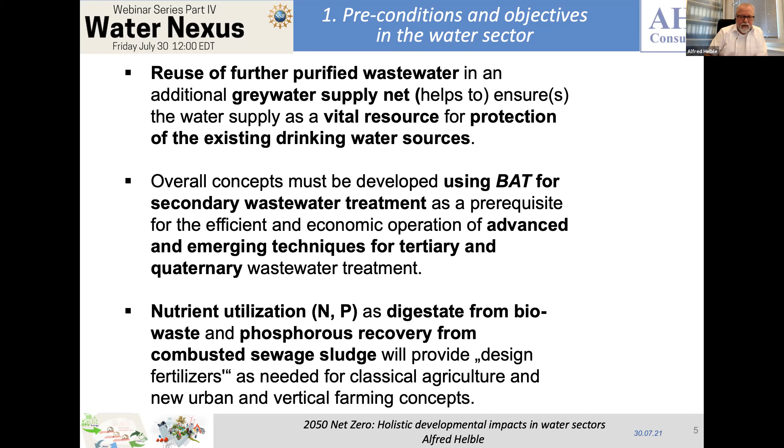So we have to look and focus on the full treatment line, which is on the water side the secondary, tertiary, and quaternary wastewater treatment, but also on the sludge treatment, including sludge utilization as fertilizer as long as possible. But this, you will see, is only possible in Europe and Germany until 2029. After that we will have to burn and combust all sludges and recover phosphorus later.

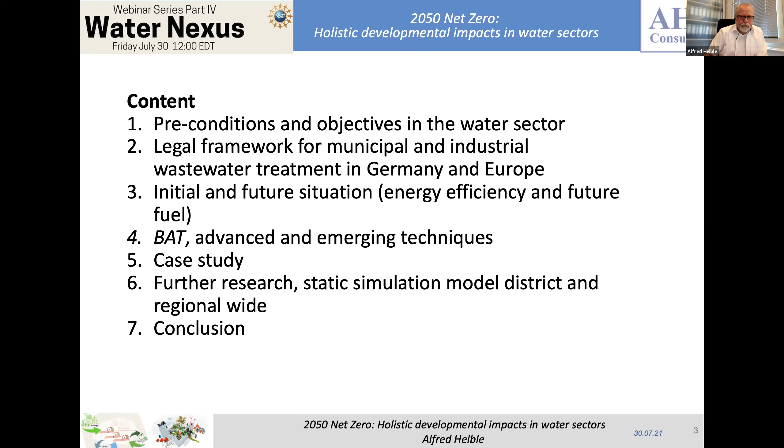So it is clear that the concepts cannot be designed in one step with everything ready just by pushing a button. It will take time, and we have to increase and extend our system step by step so that we have a working and reliable overall concept.

It is clear that further R&D is required, and okay, I don't like this word master plan, but we need one, and this is also a basic precondition which we have to consider from the beginning.

We have to put as a basic precondition a district, regional, or even country-wide range for the processes, for the wastewater, for the food waste, for external biomass, and everywhere where we can integrate anaerobic processes, to include the biogas side as good as possible.

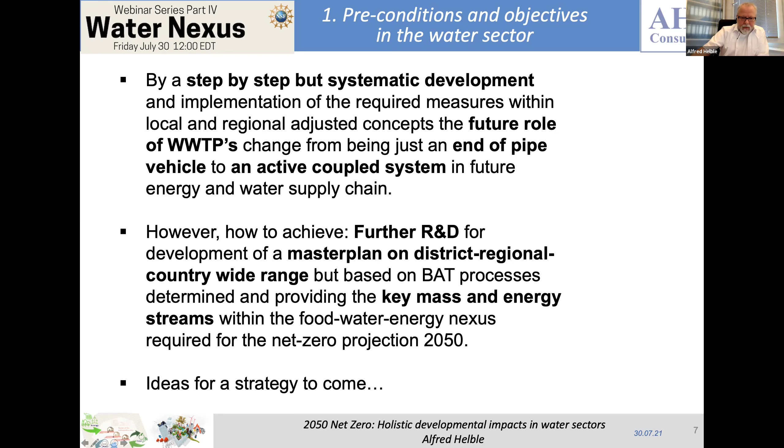Now jumping to some legal framework conditions. We have in Germany and Europe a European framework, of course, and the German Federal Water Act, where the treated effluent quality parameters are defined in detail. This is for municipal wastewater treatment and for industrial wastewater treatment, and this is, as I previously mentioned, important when we go to the design or redesign of existing systems and make them ready for extension and application of tertiary and quaternary wastewater treatment.

We have a quite new regulation since last year for the requirements for treated effluent reuse, which will help us to define the real quality needed. This means also that we do not always need, in each case, up to quaternary treatment. We have to decide and look where we want to reuse, and in which quality.

This is an important legal requirement for sewage sludge, where, as I mentioned before, recovery of phosphorus from sewage sludge by incineration of the ashes and recovery of phosphorus will be required in 2029.

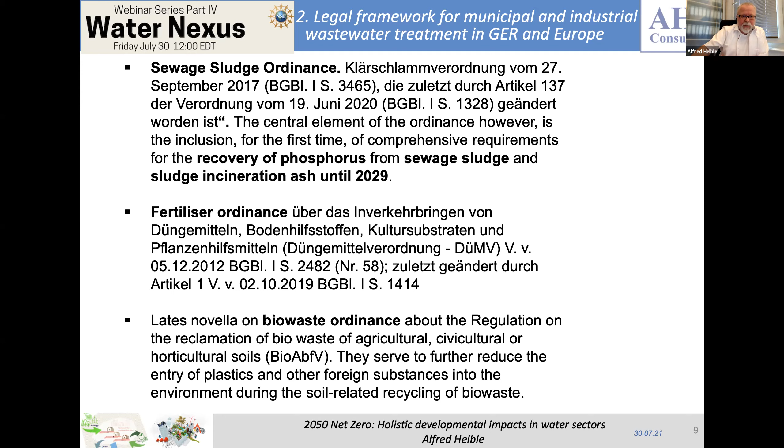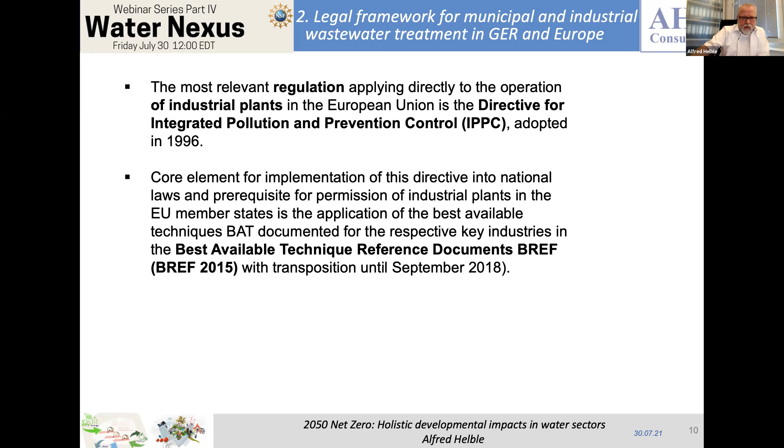And we have, of course, special regulation for industrial wastewater treatment plants, which I mentioned here when we come to regional concepts, where we might have industry on place, which also might produce not a big flow of wastewater, but a big load, where also anaerobic treatment can be applied. So just one example of treated effluent values which we have to accept.

This is a table where we have the most important parameters like COD, BOD, ammonia, total nitrogen, and total phosphorus. And this is the size, number of population equivalents, from 1,000 up to more than 100,000. And here you can see that big wastewater treatment plants beyond the capacity of 100,000 need to have much higher treated effluent quality.

This means also that this big installation will be able to reuse in a maximum capacity, because the organic pollution is minimized, and also the remaining nitrogen and phosphorus, which often causes problems when we go to tertiary treatment, in terms of remaining biological activity, biofilm, and biofouling effects at the end of the day.

But this shows also, and this is what I would like to point out here, that very small wastewater treatment systems will have higher values, but they will have higher values because the efficiency in such small systems is, everybody can understand it, much lower than in a big installation. This means at the same time, which is a big discussion about very small decentralized installations, they will not be able, from my point of view, to have nearly the same removal efficiency for pollution, and will not be able to have this reuse quantity required in future.

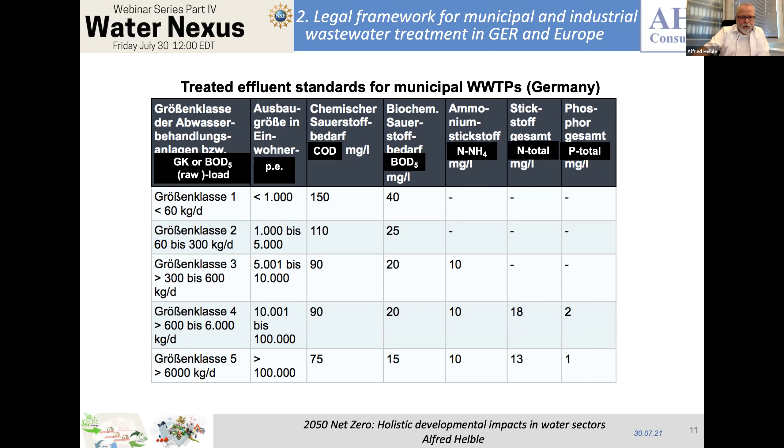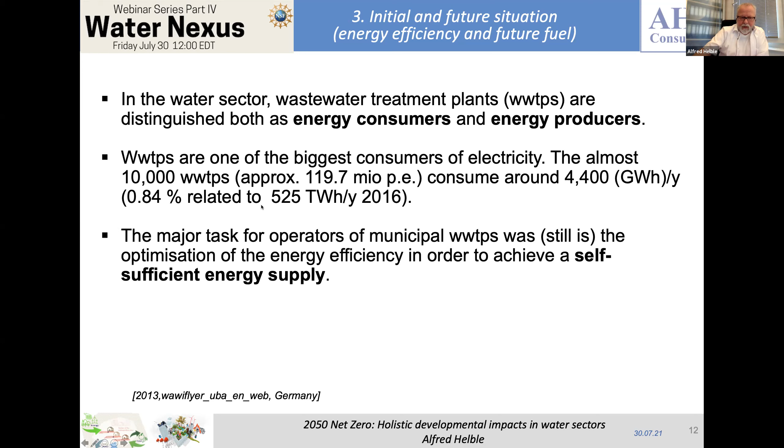So now I would like to jump to energy efficiency. To summarize it, okay, we have some 10,000 wastewater treatment plants in Germany, and as everybody knows, wastewater treatment plants consume a lot of energy, but also can produce some energy.

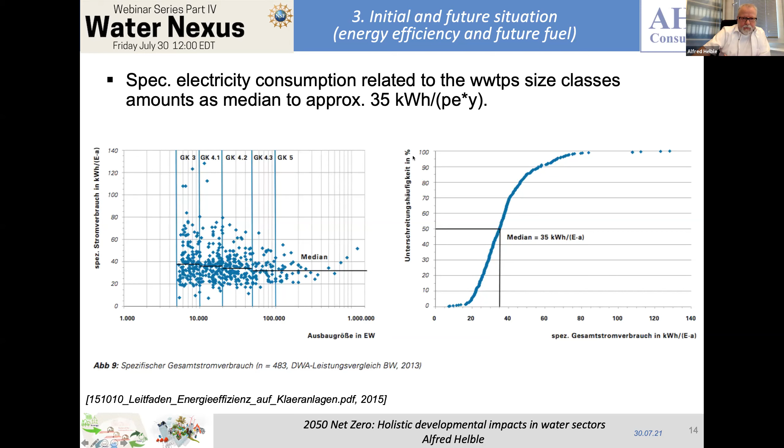So what we see here, we have, just to have an average figure, 35 kilowatt hours, always per population equivalent in a year. And I will use this number often later when we come to static simulation modeling. So same is here for consumption.

So the part of improving energy efficiency is, of course, in general where possible, to change aerobic to anaerobic sludge processes, sludge stabilization processes. This means that up to now, wastewater treatment was done by anaerobic sludge digestion down to maybe 15,000 population equivalent or 20,000, which now goes to 10,000 or below. Of course, we have to upgrade and optimize and look for machines with optimized electrical load. But this is, I would say, for the time being, this will change in future.

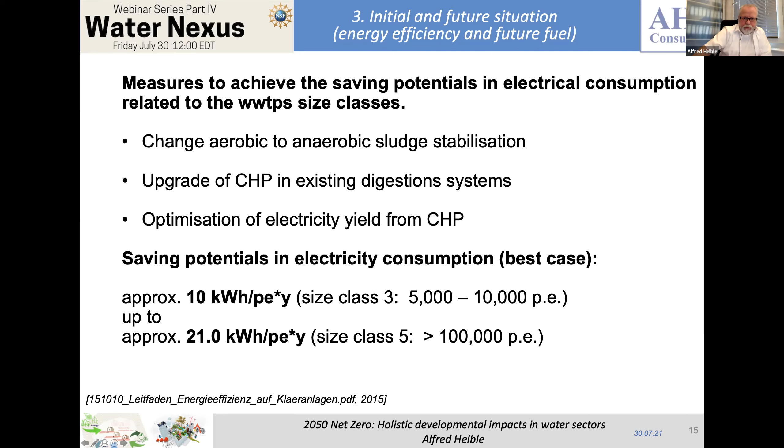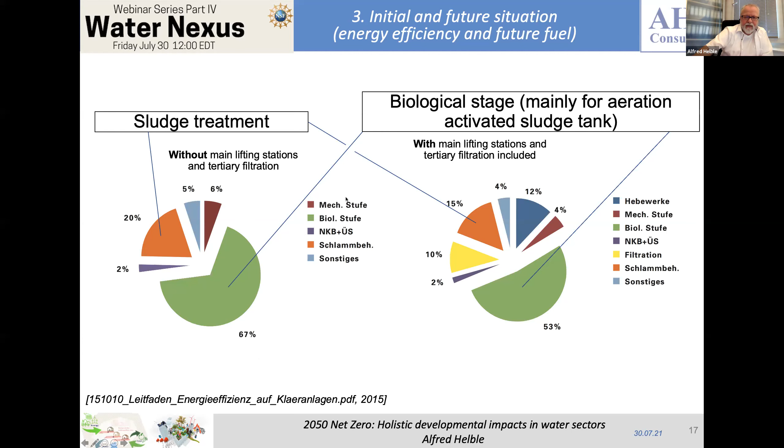So I'll jump to this, time is running. This green part is just to show you the energy consumption in the aeration tank of wastewater treatment plants, which is more or less 50% or even higher, depending if we take raw water pumps into the energy consumption. But this is just to show, when we come to reuse from electrolysis, where we can use the excess oxygen in future. I will come back to that.

So we have a detailed overview about the consumption of wastewater treatment plants. This will base on our case study with our partner near Stuttgart, Landkreis Ludwigsburg, where we can see that depending on the size of the population equivalents and on the efficiency of how well anaerobic digestion is applied, we have plants with a level below 20 kilowatt hours per population equivalent in a year, which comes to 96% of electricity self-supply.

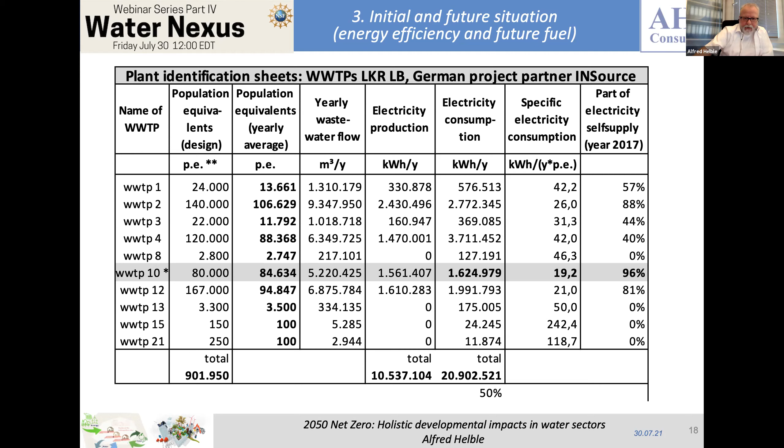This is important to see that the production of biogas and its utilization provides a big energy part, or is a big energy storage, when we come to future projects, and burn it not only in CHP units but also put it into the renewable energy net.

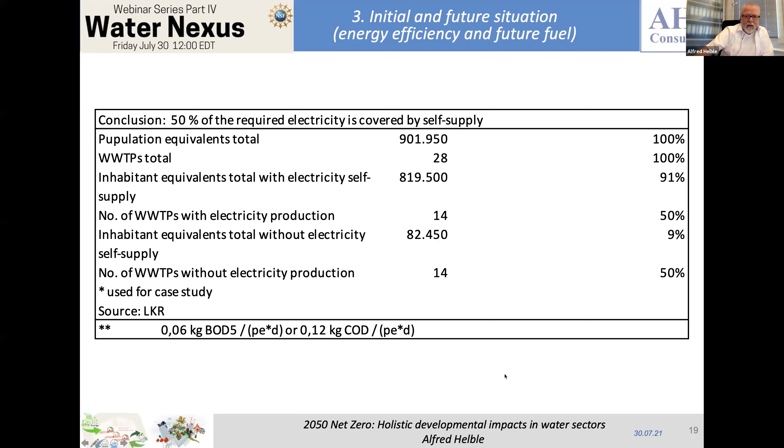This is in German, but this should just indicate that purification of biogas will enable production of biomethane that can go directly into the natural gas net.

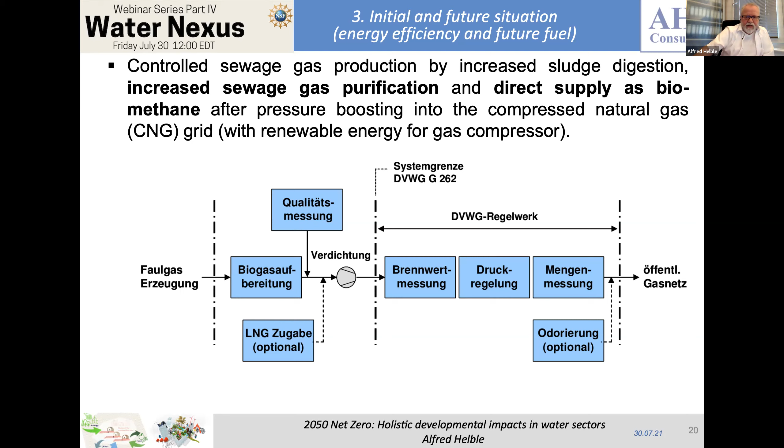Another interesting possibility in future is the production of green hydrogen by methane plasmalysis, where we use biogas and transform it to hydrogen. What's interesting with this process is the remaining carbon, so-called carbon black - it's coal, carbon, which can be used for tires or other applications later on.

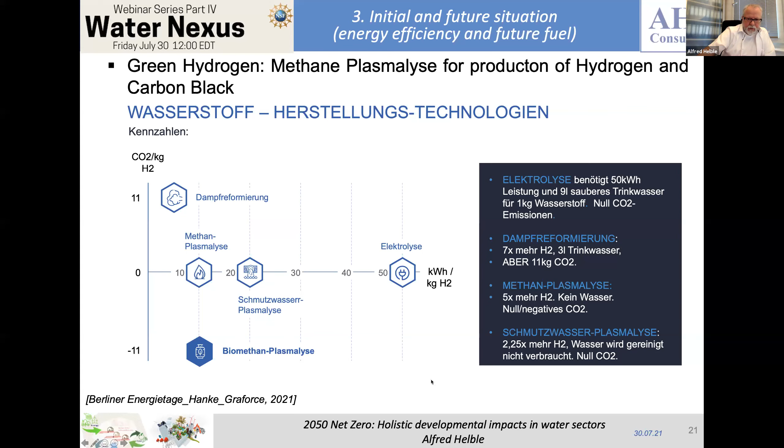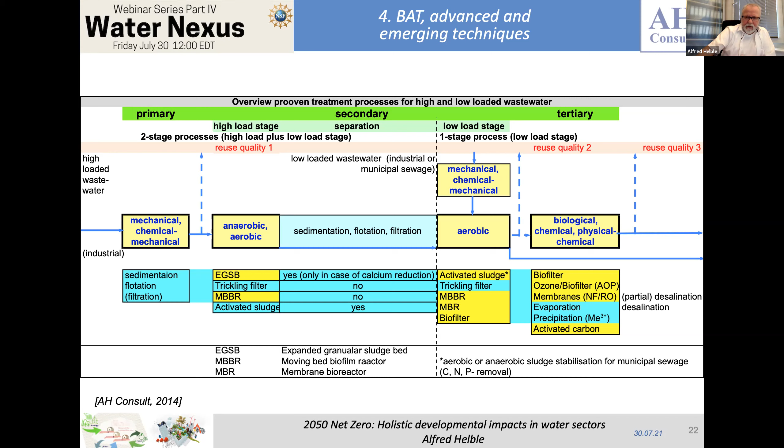Emerging techniques: there is a big variety of processes which we have to apply, and this will become much more important in future - we need adjusted processes for wastewater treatment, either municipal or industrial, to achieve full biological removal efficiency, which is required for reliable tertiary and quaternary treatment.

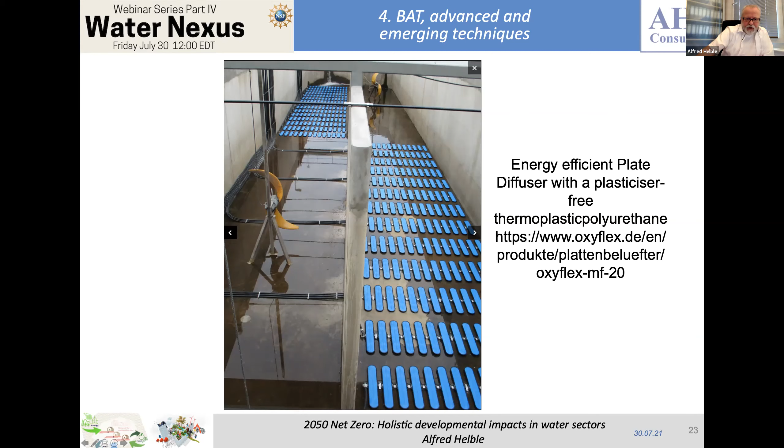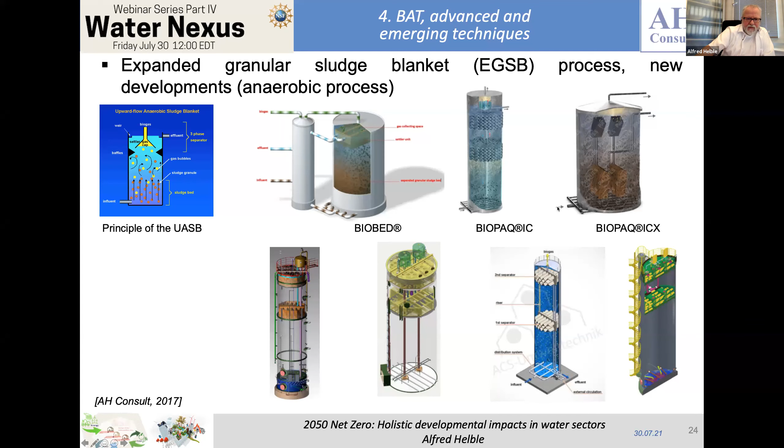This is interesting when we can use anaerobic processes in industrial applications, where the expanded granular sludge blanket process is applied when we have COD concentration of at least some 1,500 up to 2,000 milligrams per liter.

This is the MBR process, which you probably also know. I point it out once more here because it will be one part applied in future for treated effluent reuse.

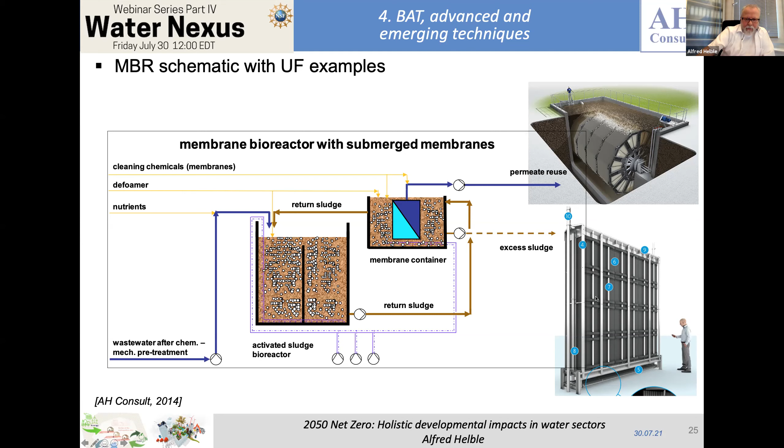So we have different types of membranes, either arranged as a drum or as flat plate membrane modules. This is how it looked like before they are implemented in membrane containers.

This is a process applied for advanced wastewater treatment or elimination of micropollutants, which is a combination of ozonation, also well known.

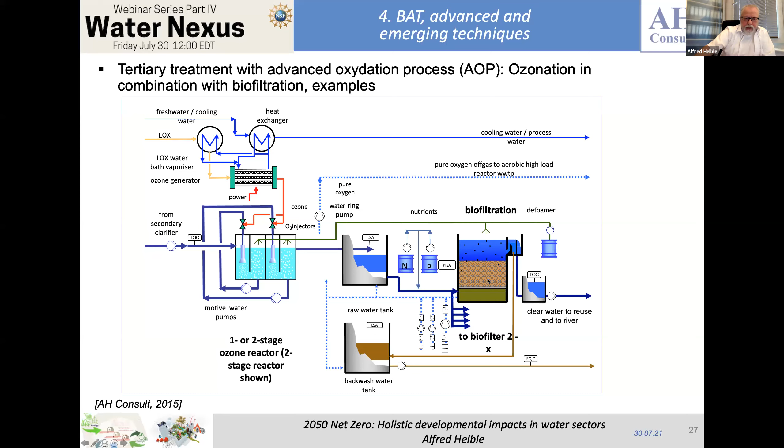I applied this concept in a large industrial plant, I think 2-3 years ago, where we used a special type of ozone reactor in combination with biofiltration - an upstream filter with special media - where we had the possibility for further removal of persistent or non-biodegradable COD.

If you look at this slide with relative units, it will be possible to reduce persistent COD after full biological treatment by up to, let's say, 90%. So only some 10% remains.

This is very important if we would go beyond reuse, toward nearly drinking water quality using reverse osmosis. With these processes upstream, it would be possible to produce drinking water again, but we need these processes before.

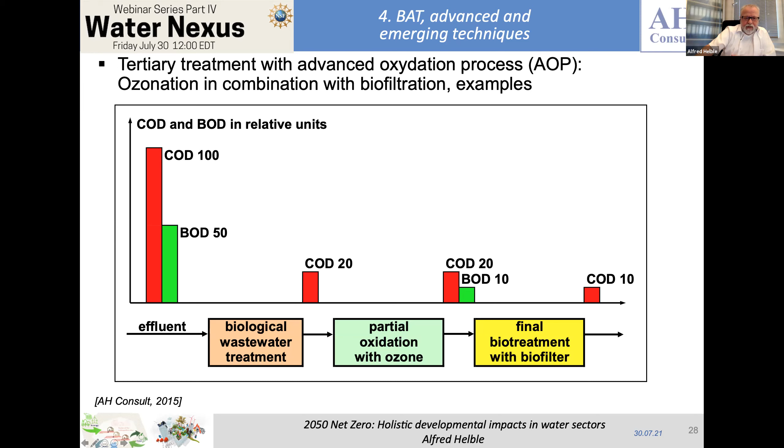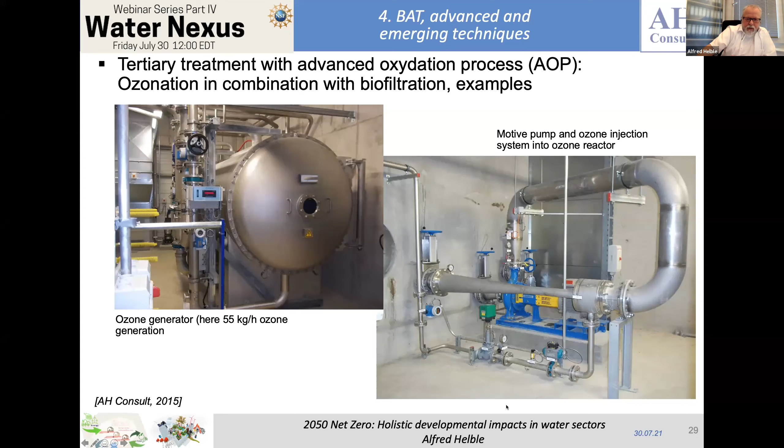Case study: it was interesting to look at this Gowanus case study, where the requirement was to find a net zero approach for a new district with some 60,000 capita.

This was developed without looking at existing wastewater treatment plants, because on the practical side we would always check whether we could integrate additional capacities in existing systems and improve and extend them.

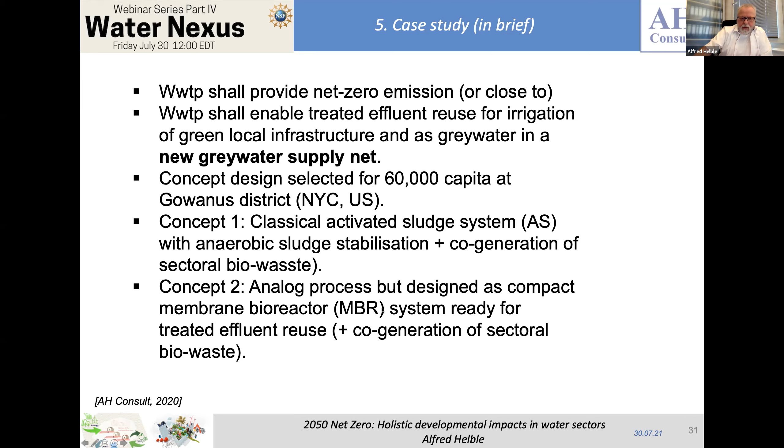On the other hand, this was a case study to show how such a wastewater treatment plant would look if we built it in the district itself, and what advantages we might have. So I made a design and layout for a classical activated sludge system, and in concept 2, a membrane bioreactor system.

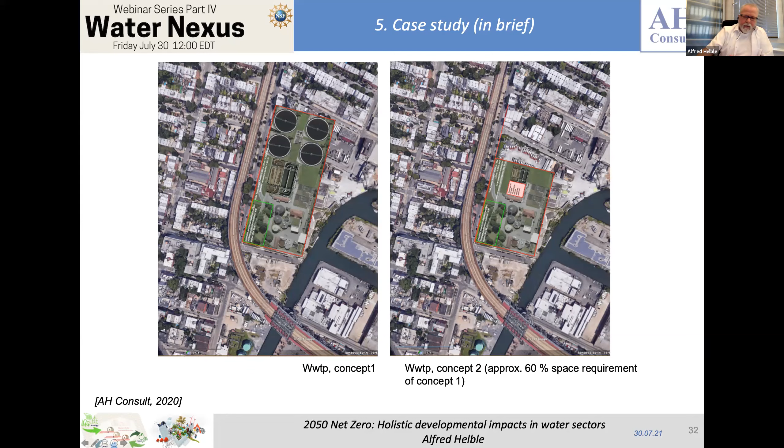Compared to that, we could have an MBR concept needing approximately 60% of the space of such systems, making it possible in principle to integrate this type of wastewater treatment plant where applicable, with shorter distances to the wastewater source and for reuse of the treated wastewater.

If this would be based on a system like I showed for our case study in Germany, we would be able to have some 90% self-electricity supply.

In order to achieve 100%, I calculated the energy and assumed that we could produce this additional energy by digestion of biowaste, which ends up equivalent to some additional 20,000 residents.

So if you would have a classical wastewater treatment plant, we could make the system self-electricity supplied by using additional biowaste sludge, either as co-digestion or in a separate plant.

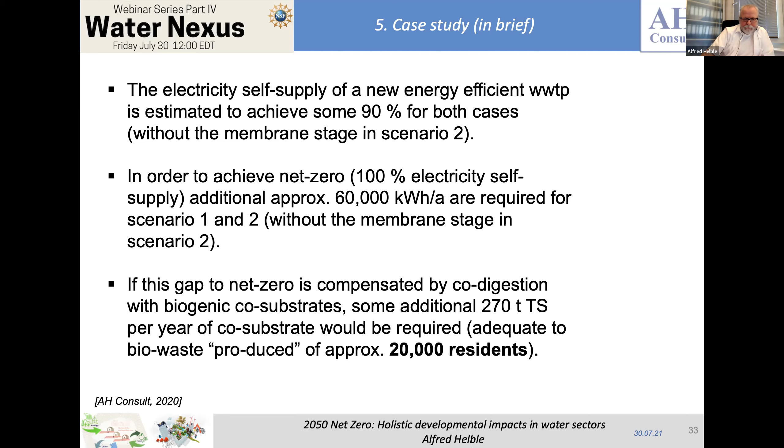So just to have some figures, if we would go to the MBR system, where of course the membrane stage will consume more electrical energy, this would rise to some 700,000 capita to have enough bio-waste available for production of biogas. Just to have a ratio, but at the end of the day it just should show that there is a big potential of integrating and making a concept with wastewater treatment, sludges, and biowaste.

What is also important to point out is that the reuse potential of such a system would be that we could reuse 100% of the treated wastewater after the membrane bioreactor system. This means that instead of requiring, as today, around 340 liters per capita per day of water consumption and needing above 20,000 cubic meters, with reuse this could be reduced to some 7,000 cubic meters per day, which is close to the required drinking water we need today, having below 20,000 capita.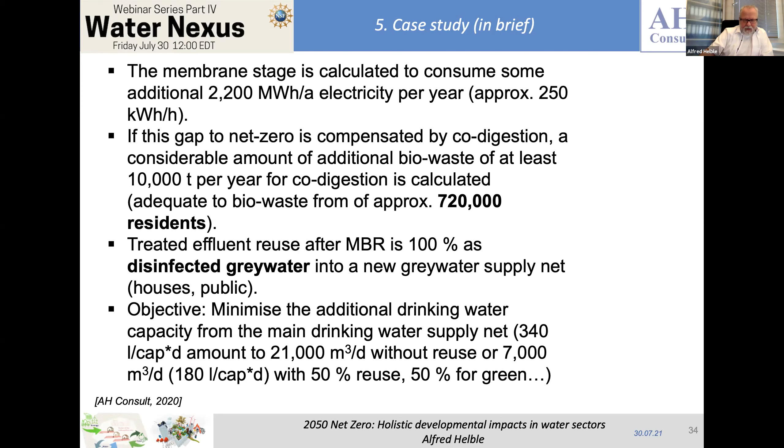So how to achieve this? What is difficult to see for you, I just want to show it briefly. I think what we need to develop is like a static simulation model. This shows the wastewater treatment part, the digestion part, and the energy part.

So what you see here is that I started to put the energy consumption for the main stages. I put what we get back from biogas, biomethane, steam reforming, electrolysis, where we need energy, but where we get back oxygen, which will be used for the aeration tank and will reduce the electrical consumption in the aeration tank as well. This means having such a model,

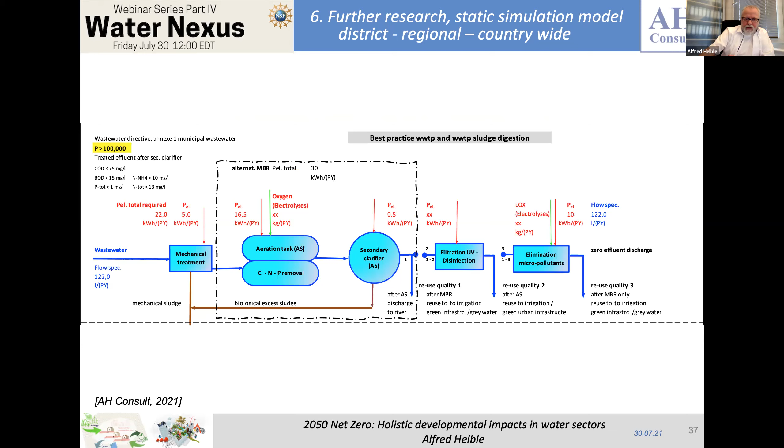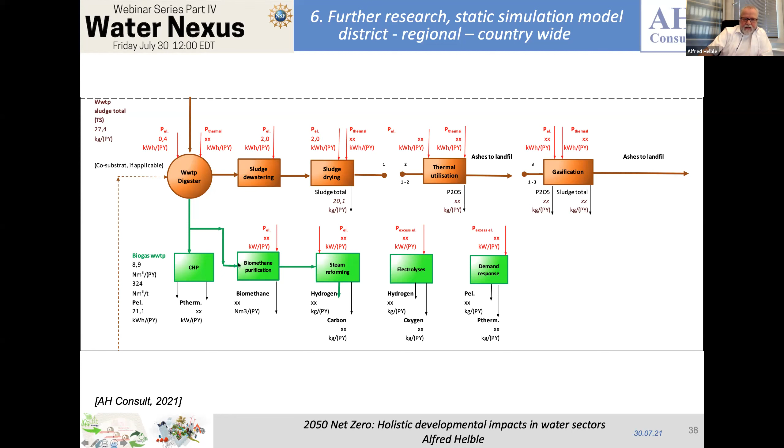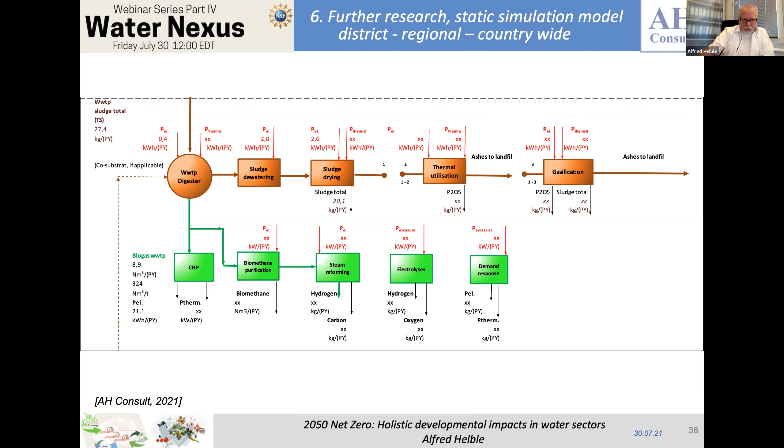including the bio-waste part, we will be able to calculate different electricity consumption parts, and also depending on which type of biogas utilization we think and should be applied. So we will be able to see on a district-wide and also regional-wide range how the energy and water capacities might be directed in the future, and which benefits, advantages, and disadvantages we have to achieve the net zero projections.

So, yeah, static simulation is what I will prepare within the IN-Source project to quantify such a model and to better show the potential of biogas utilization, not anymore just in CHP units, but for utilization to biomethane or directly to green hydrogen.

When we go to regional concepts, this is also a part which developed very much in the last year, but which will develop even more in the next years: renewable biomass utilization with consideration of compounds in a new biological circular economy has to be considered as well.

This means that we will change the biomass production just in monocultures. We will look at the advantages of using other types of energy producers, like this picture of a plant, it's called Silphie, and it produces nearly the same energy by digestion. But what is important, the fibers which can be separated before digestion can be used for other purposes. And this is an important thing which has to be developed within bioeconomy strategies.

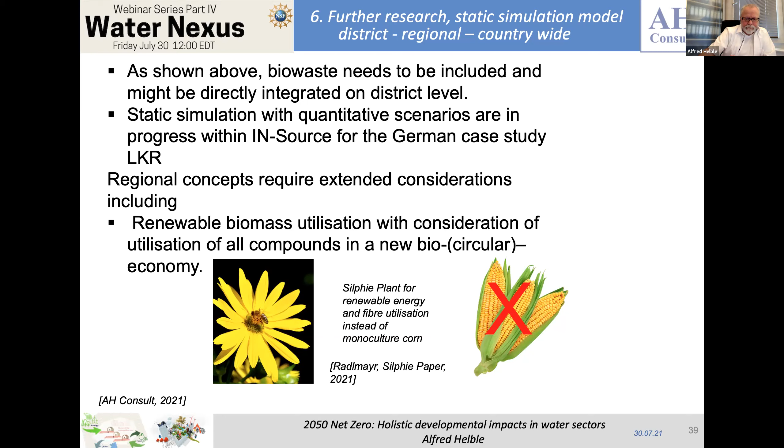Okay, so time is running, so I'll try to come to some conclusions.

So again, sector coupling by biomethane production or transformation to green hydrogen, and also demand response strategies, which of course can more effectively be applied in large wastewater treatment plants, provide high potentials.

Best available technology processes are required, and we have to keep this in mind when new concepts are developed, to enable maximal treated effluent reuse, which in the food-water-energy nexus serves the water part for the food supply, but also saves groundwater and surface water capacity - an important thing.

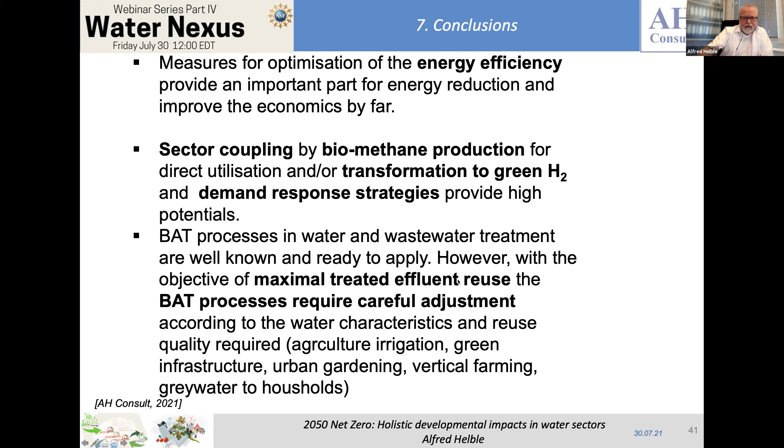No time to lose. Sector coupling requires, of course, research, and what I showed in this plasmolysis thing, having biogas transformed directly to hydrogen, is of course a high-tech process and has to be studied carefully.

Yeah, stakeholder involvement, together with fast political decisions, would hope for implementation of complex nexus measures - of course a challenge, but seems at the same time to be also the only chance, from my point of view, for reaching the 2050 goals.

So we have to start. What is missing on the research part is this overview, this model, which allows us for determination which processes we have to apply in the secondary wastewater treatment, in the tertiary treatment, in the quaternary treatment, to achieve the required quality of the reuse.